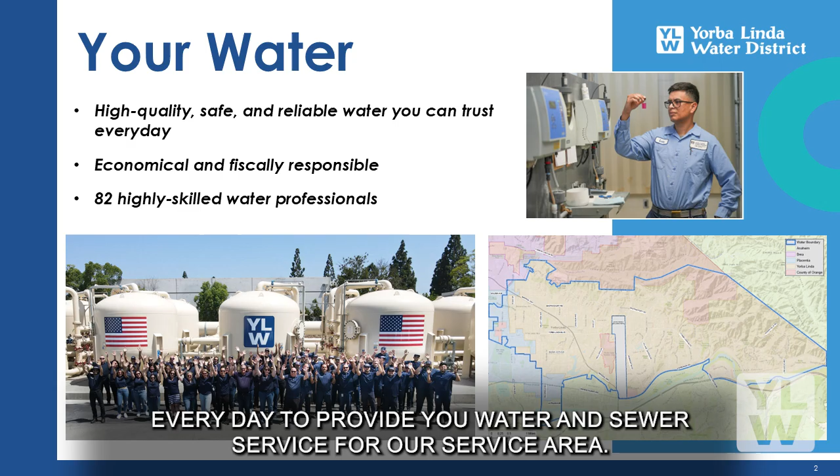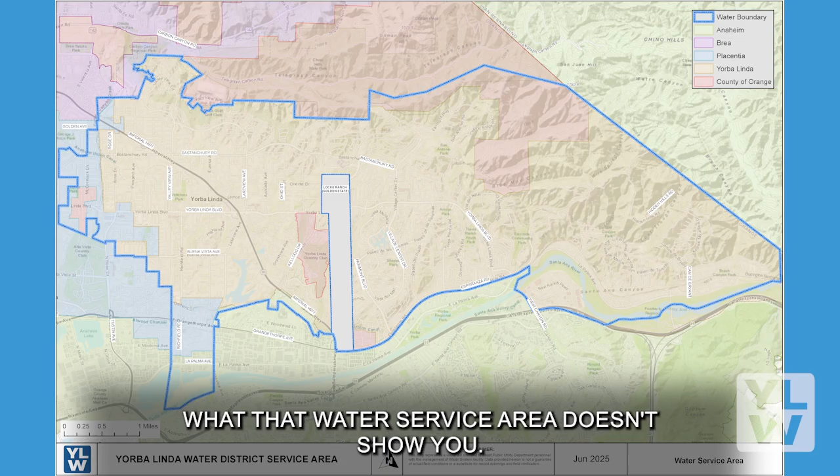For our service area, over here is our service area. And if you look at the boundaries, first off, we're located here in this peninsula in Placentia. We're the Yorba Linda Water District, but we're in Placentia. I never understood that. But we not only serve mostly the city of Yorba Linda, but areas of Placentia, Brea, Anaheim, and unincorporated Orange County. That's 20 square miles.

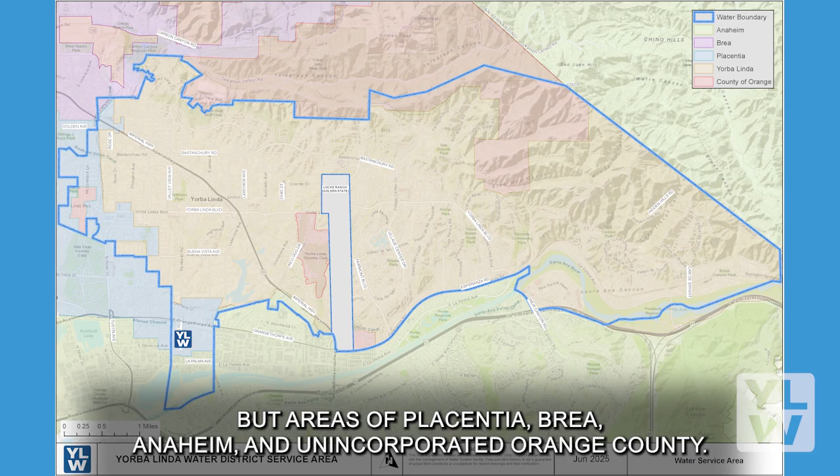Even though it's a two-dimensional rendering, what that doesn't show you, depending on where you live, is the elevation changes that exist here. We're here at the headquarters at about 250 feet above sea level. But there are areas in our eastern sector. Does anyone live on the east side at all? Ma'am, 1,390 feet if you're up in the hills.

So it takes a lot to get the water from where we are located here all the way to our highest elevations. You might notice this area here in Locke Ranch that almost bifurcates our area.

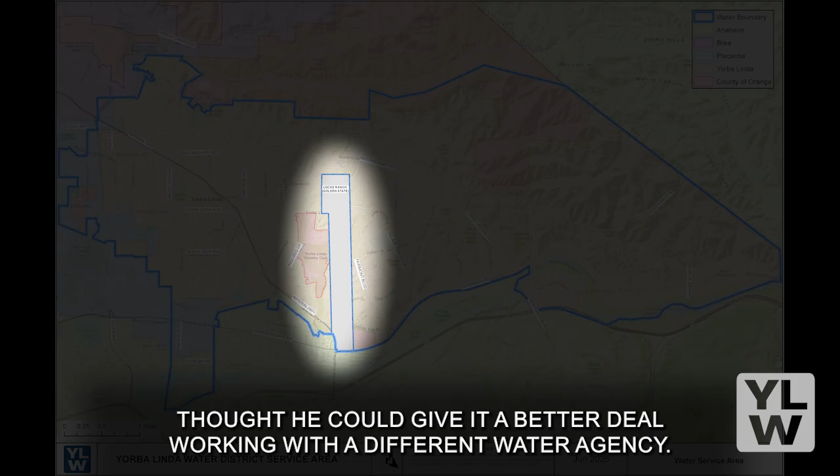So we've been around since 1909, a long time, and I'm not sure exactly of the history, but as this area was getting ready to expand into our eastern area, probably Mr. Locke thought he could get a better deal working with a different water agency. So although we provide sewer service for that area in Locke Ranch, it's actually served by Golden State Water. Okay, so that's why it looks like it is.

The other interesting part of this that people not from Yorba Linda don't understand is that on our northern boundary is Chino Hills State Park. Because we're at a wildland urban interface with that park, we're susceptible to wildfires, which I know you're familiar with given what happened a year ago at the Palisades and Altadena. So we're very mindful of that, and we'll talk about what we've done to mitigate that threat throughout our process.

But we serve a 20 square mile area, about over 80,000 people, in this area that encompasses the Yorba Linda Water District.

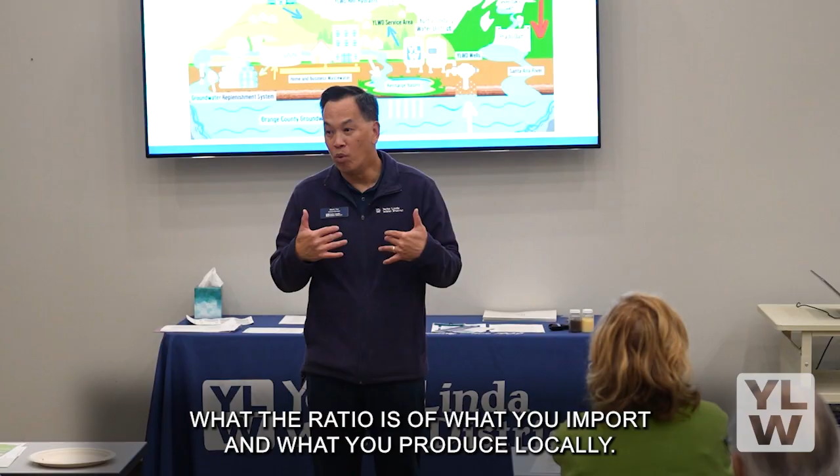I love this slide my staff put together because it really shows how Yorba Linda, the city, gets its water. In the state of California, for all of us in Southern California, there are different ways of getting water. You can import it from Northern California or the Colorado River, or you can create it locally. What makes different areas of the city different is the ratio of what you import versus what you produce locally.

If you look on the right side of the slide, we get all our water through a watershed called the Santa Ana Watershed, 2,700 square miles. The main water feature is the Santa Ana River, about 100 miles long. It goes all the way from Big Bear down and deposits around Huntington Beach and Fountain Valley.

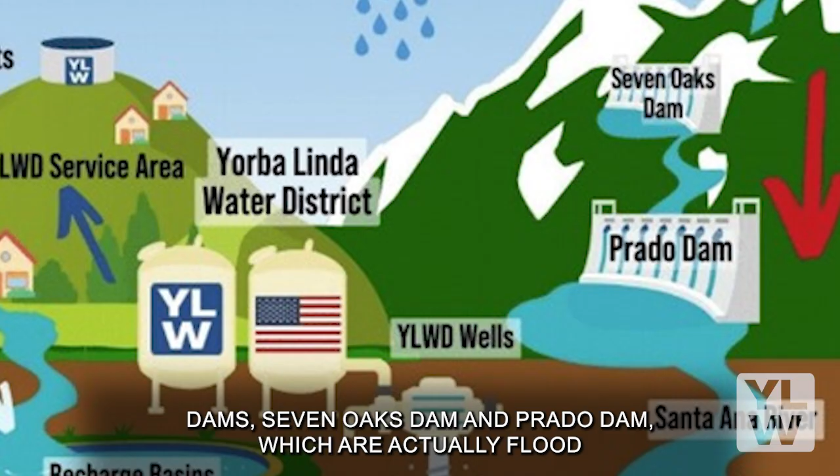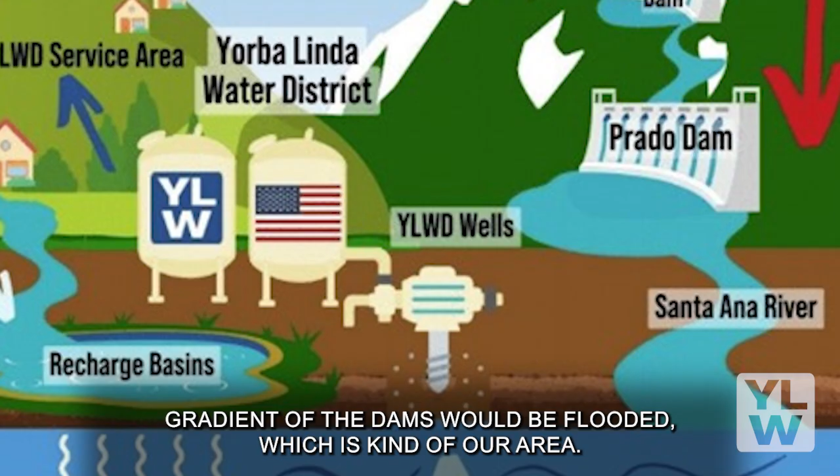So over the winter time, which we're in right now, we rely on the snowpack and the rains that fall in that watershed and river, which goes through dams like Seven Oaks Dam and Prado Dam, flood control structures run by the Army Corps of Engineers. If we didn't have those dams, the area down gradient would be flooded, which is basically our whole area, all the way to the coast.

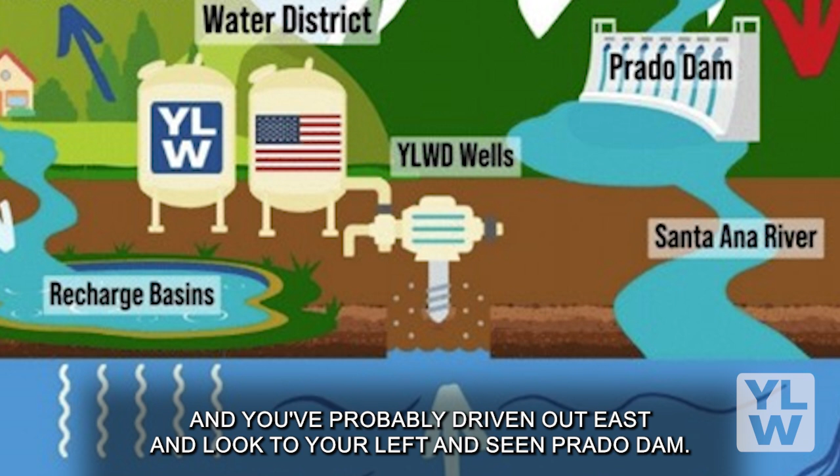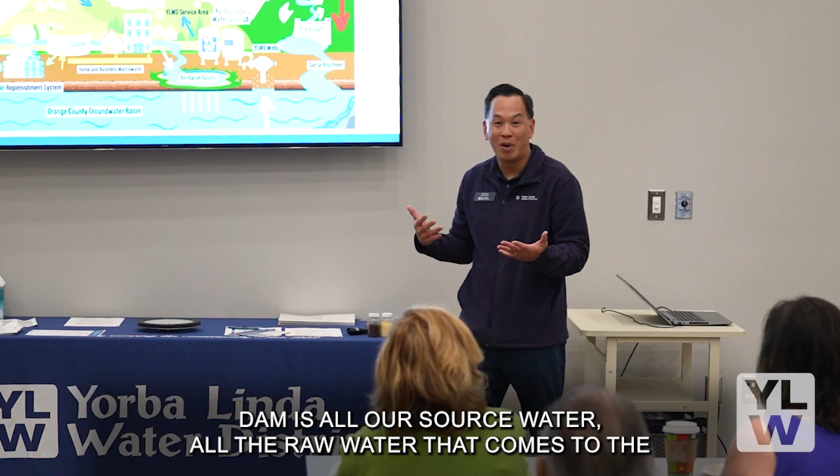Many of you have been on the 91 freeway, driven out east, and looked to your left and seen Prado Dam. The thing you have to appreciate is all our source water, all the raw water that comes to the Yorba Linda Water District, flows out of that flood control dam into the Santa Ana River.

And the Santa Ana River goes by the Yorba Linda Water District. We're the first water district west of Prado Dam for the source water, so everything comes out of there.

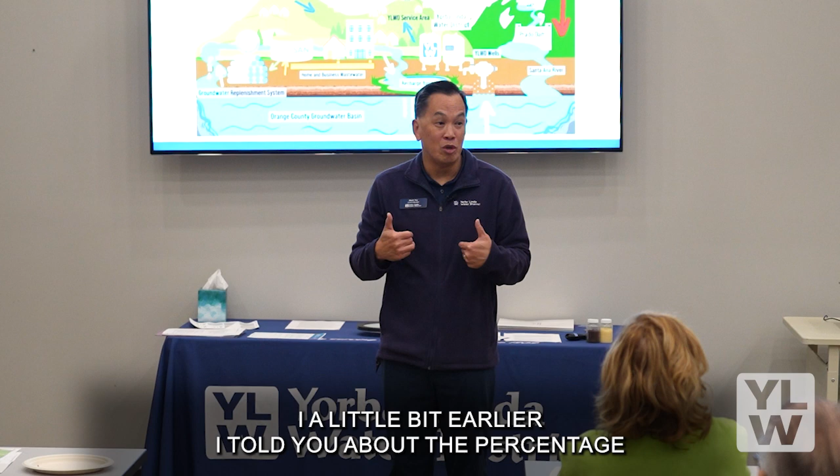I mentioned earlier that the percentage differentiates areas based on how much water you produce locally versus what you import. We're very fortunate — if you live in north and central Orange County, you live in an area with a groundwater aquifer, a reservoir below the surface that allows you to store water. Because of this, we're able to get 85% of our water from groundwater.

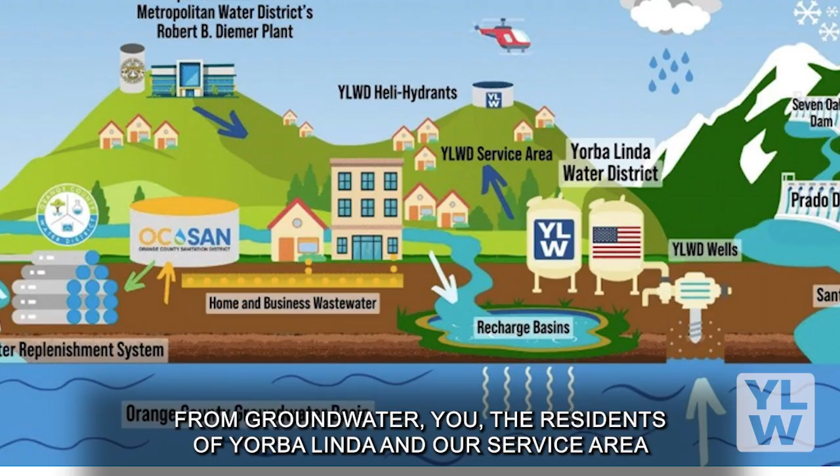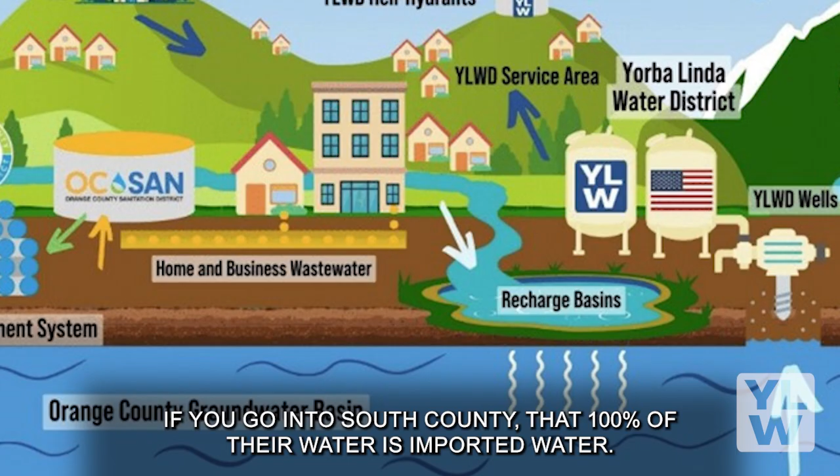So the residents of Yorba Linda and our service area pay a lot less for water than those who have to rely on imported water. There are parts of Orange County, like South County, where 100% of their water is imported from Northern California or the Colorado River. And the key figure to understand is imported water is twice as expensive as the groundwater we generate. So we're very fortunate.

So if you're in north central Orange County, you're very fortunate. My wife wanted to move when we first got here, and I said no, we can't move into South County because they get imported water and we'd be paying way too much. So having this groundwater basin is really great.

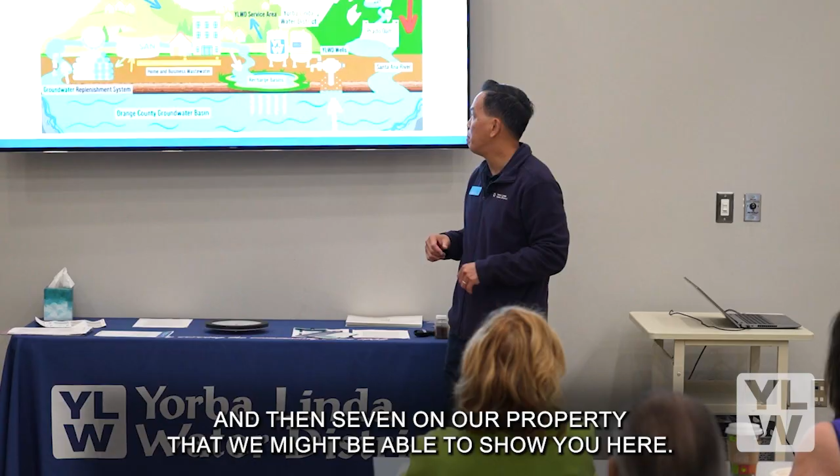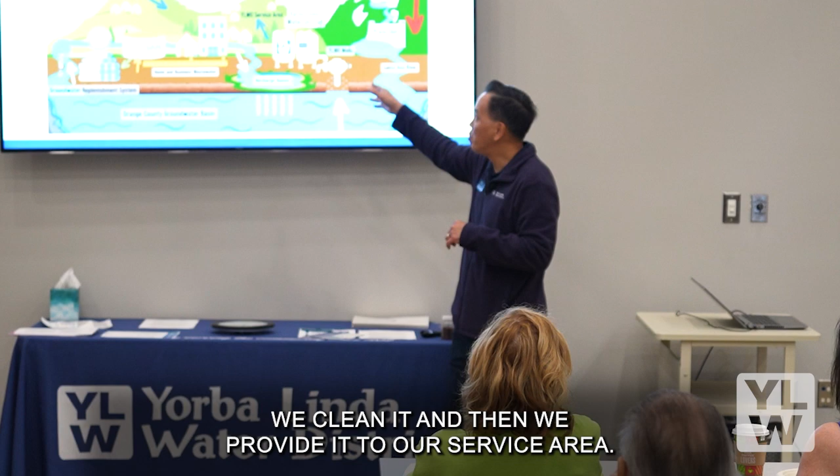So we're the first district, and all our groundwater wells pump water out near the Santa Ana River. We have 3 wells by the Santa Ana River and 7 on our property that we might be able to show you here. Once we pump that water out, it's treated — it has PFAS, which we'll talk about later on our tour. We clean it and then provide it to our service area. You can see the Diemer plant — you've probably looked up in the hills and noticed it.

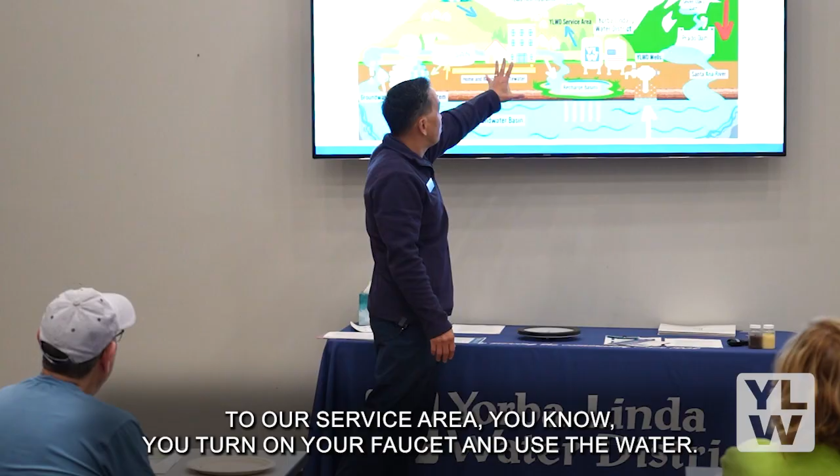That Diemer plant is in charge of the imported water provided to our service area, not only here but to San Diego County and other parts of South County. All flows through the Diemer plant. So once the water is provided to our service area, you turn on your faucet and use the water, it flows into the sewer system, which we manage as well, and then it's gravity fed all the way to Orange County Sanitation District in Fountain Valley, where they do wastewater treatment processes.

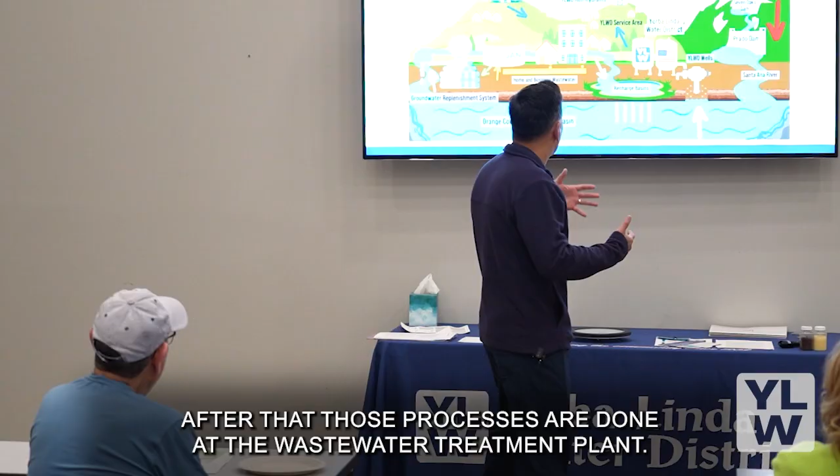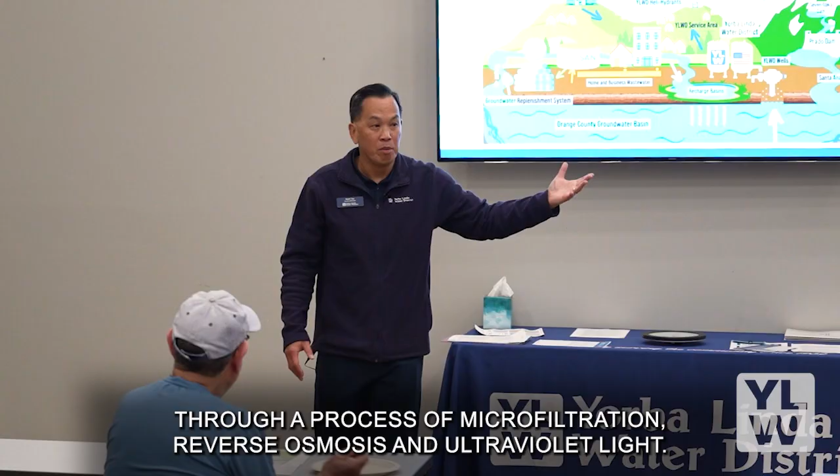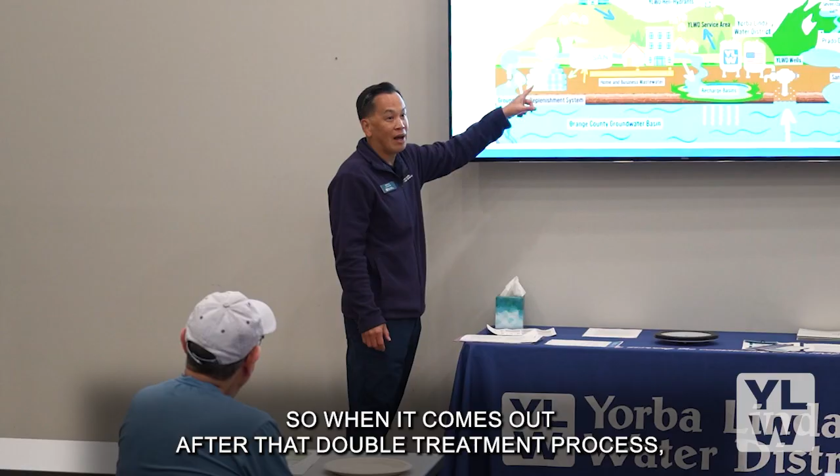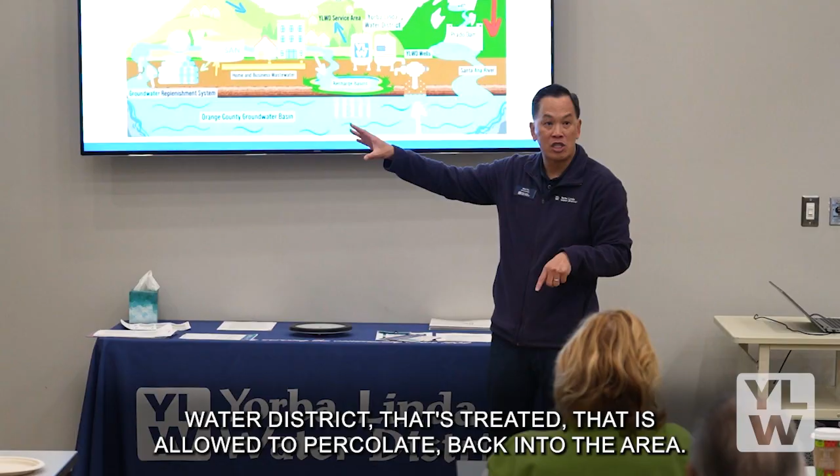Many of you might not have heard of Orange County Water District. They manage the aquifer, but they further treat that wastewater through microfiltration, reverse osmosis, and ultraviolet light. They treat it so well that you can actually recycle that water. After that double treatment process, first at the wastewater treatment plant and then at Orange County Water District through its groundwater replenishment system, it's pumped all the way back up to the recharge basins. You might have seen those recharge basins just south of Orangethorpe, west of Rose Drive. That's water pumped back from Orange County Water District that's treated and allowed to percolate back into the area.

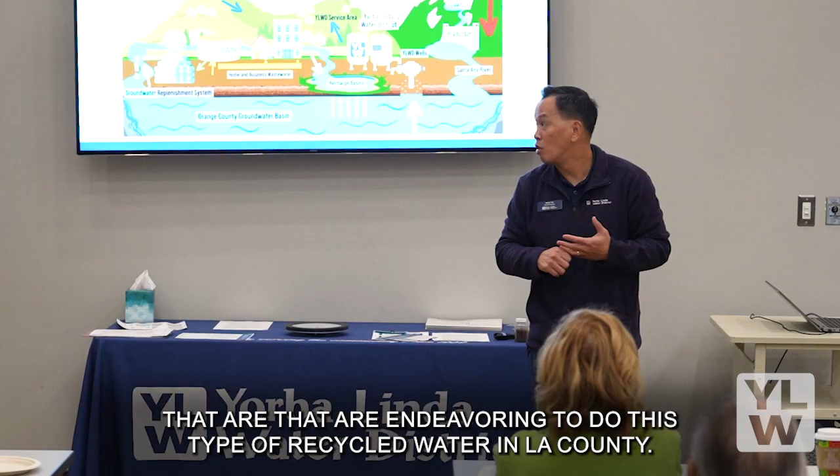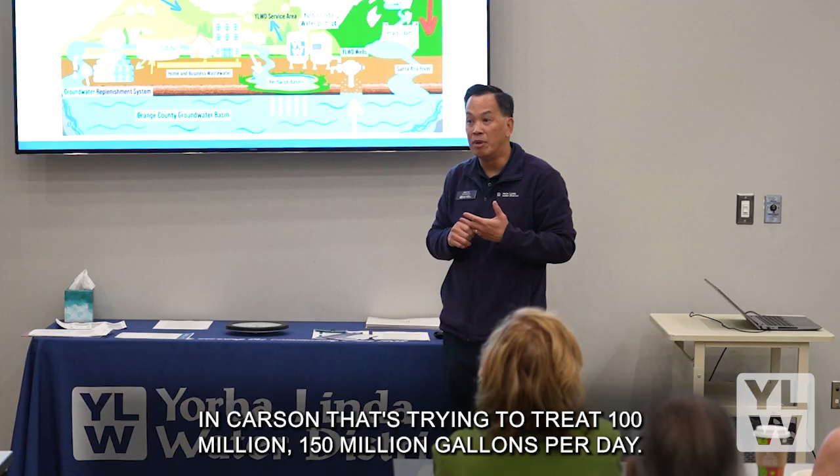When you talk about recycled water, Orange County in this area has been doing this since 2008. There are different parts of Southern California that are endeavoring to do this type of recycled water. In LA County, they have a big, really expensive pure water facility being built in Carson that's trying to treat 150 million gallons per day. They want to do what we've been doing here in Orange County since 2008. This facility here can treat up to 130 million gallons per day.

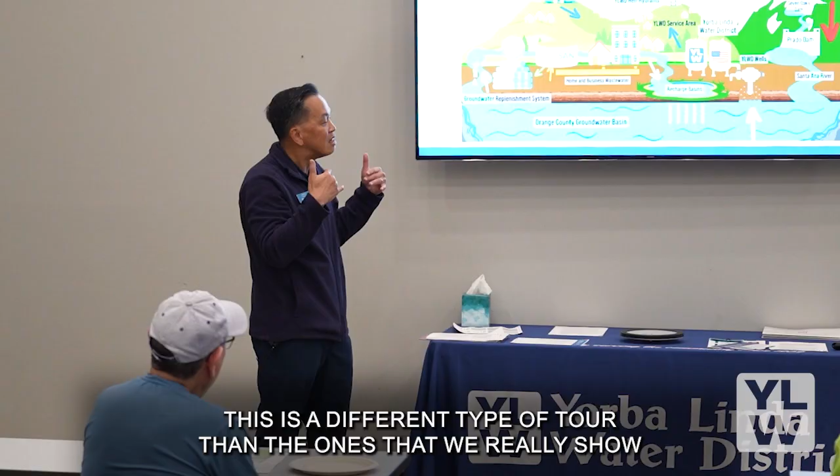A lot of water. So this is the picture I want you to think about when we talk about our tour here. This is a different type of tour than the ones where we really show our infrastructure, because we're trying to show you behind the bill and what the rates are going to be able to help us do in the Yorba Linda Water District. That's my last slide, and I'll turn it over to our CFO, Christine McElrevy, who will jump a little more into the rate study and why we're doing what we're doing. Throughout it, you can stop us anytime, and we'll answer any questions.

Good morning. I'm going to give you more of a high-level review of the rate study, but I'm happy to answer any more detailed questions that you guys have, either after this tour while we're on the bus or even after that. I can stick around after the tour if there's any detailed questions.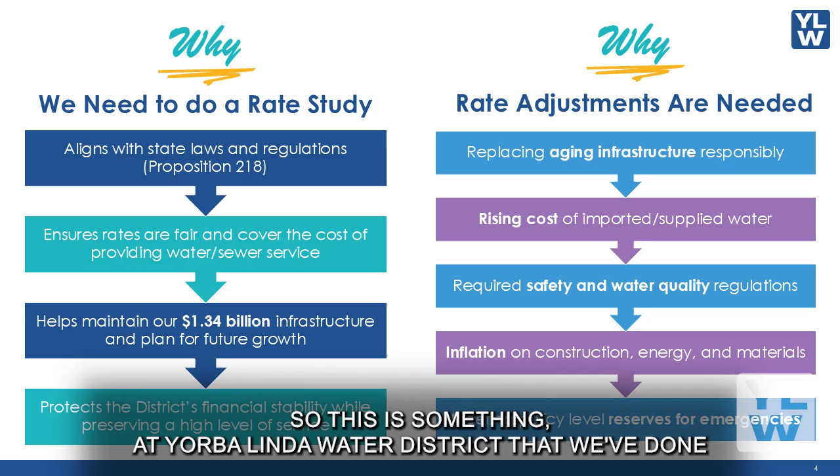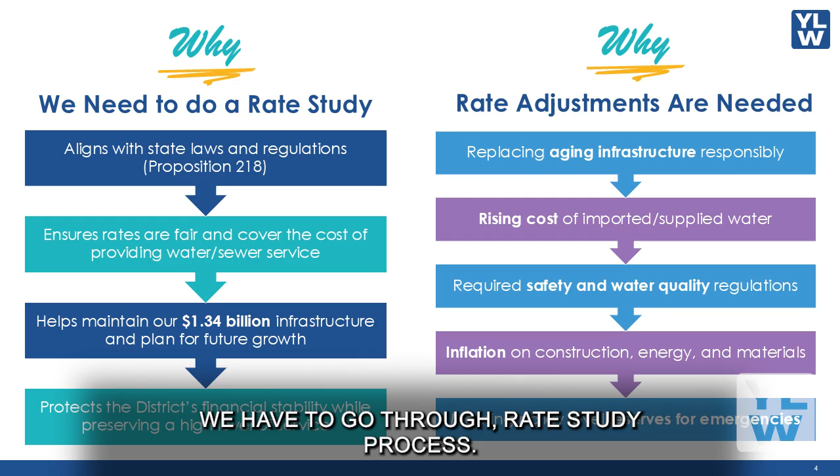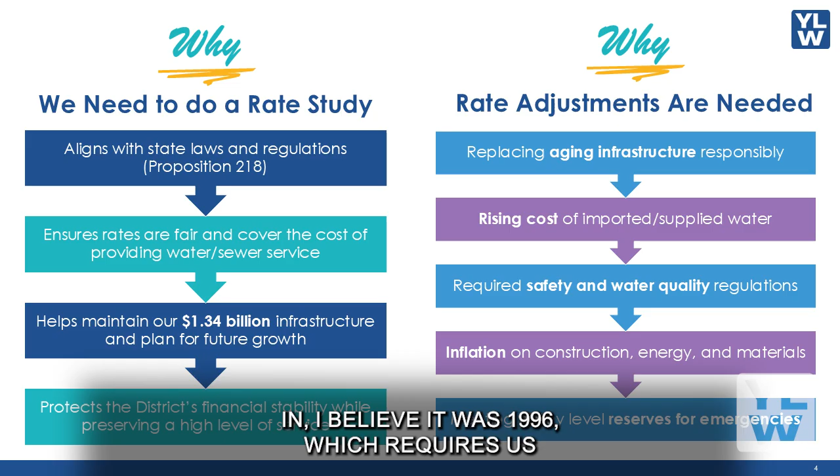So why do we need to do a rate study? This is something at Yorba Linda Water District that we've done every 5 years over the last at least 10 plus years. It's actually California law that anytime we look at our rates and determine whether or not an increase is needed, we have to go through a rate study process. It's governed by Proposition 218, which was passed by California voters back in, I believe, 1996, which requires us to go through this process, which Mark mentioned earlier — we hired an independent consultant for it.

So it's a process that's been going on almost a year now. We hired the consultant about a year ago, and what they do is go through the financial plan, look at our costs, and then look at our current rates and whether or not those current rates cover the costs over the next 5 years. And if they don't, then that's when we have to propose new rates. Part of California law requires us to make sure our rates are fair and that they cover the cost of providing water and sewer services. So what that means is we can only charge for our costs to recover those costs.

That's a very important part of that proposition. We have $1.34 billion of infrastructure, so having those rates helps pay for that infrastructure. That's really a large part of what those rates go towards, probably the largest part. And what that does is help protect our financial stability and preserve our high level of service.

To give you an example, if we were not to do a rate increase, we have different levels — what's called a debt service coverage ratio, because we do have debt on our books that we have to meet. If we were not to do a rate increase, we would not meet that debt service coverage ratio in a few years from now. So it's very important to meet that — it's a legal requirement. And then there are other target levels that we need to meet as well.

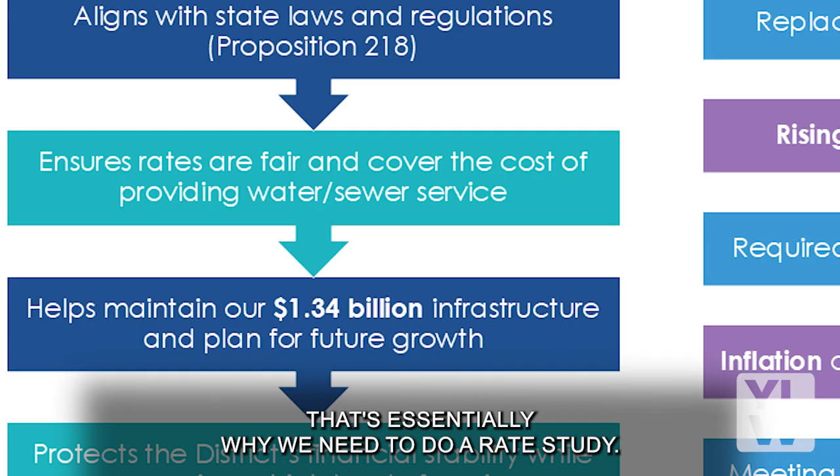So that's essentially why we need to do a rate study. One thing I want to point out that you may or may not be aware of is the rate schedule. It goes over 5 years. Those are maximum proposed rates, so that's the maximum that the board can increase the rates.

Every year, though, it's not an automatic increase. Usually in the spring, around April or May, we take it to the board, look at our financial plan and current circumstances, and reevaluate whether we recommend doing that maximum increase or even a lower increase. So if circumstances are like, say we get a lot of grant money we weren't expecting, since we do actively pursue grants, we could possibly recommend a lower increase. Not making any promises there, but just want you to know we look at that every year.

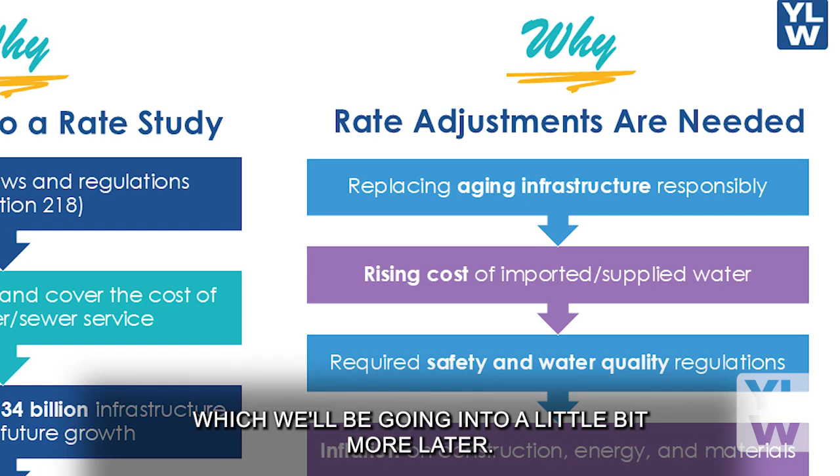Why rate adjustments are needed: Mark just touched on some of the infrastructure, which we'll be going into more later. We have aging infrastructure. Our agency is over 100 years old. Our first reservoirs, I think 2 of them, were put in in 1911. So we have to maintain that infrastructure.

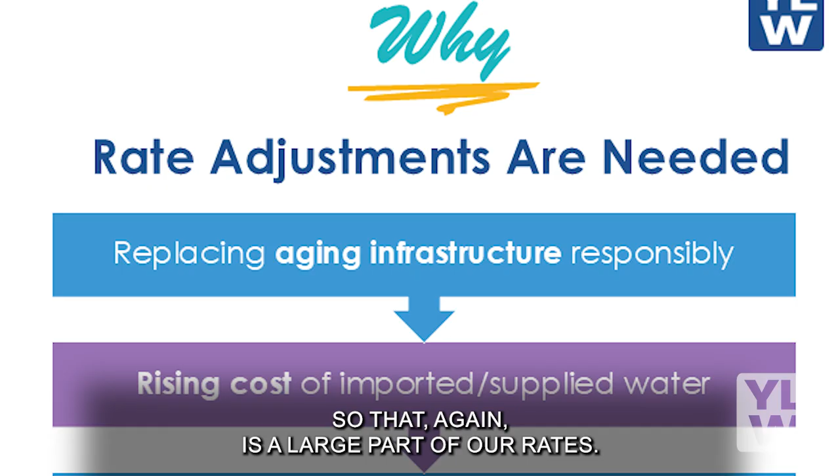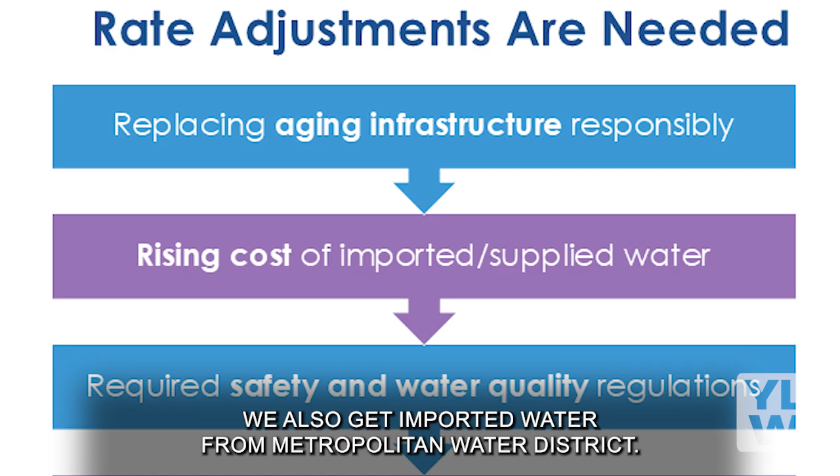That again is a large part of our rates. We also have rising costs of imported water supply. As Mark said, we're really lucky that we get groundwater from the Orange County water basin, and we also get imported water from Metropolitan Water District. For example, Metropolitan just came out with their budget over the next 2 years. Their proposed budget hasn't been passed yet, but they also have projections over 10 years. Their proposed budget is a 9.5% increase in 2027 and 2028, over the next 2 years, and then 9% each year after, over a 10-year period. So that's just an example of what we're looking at.

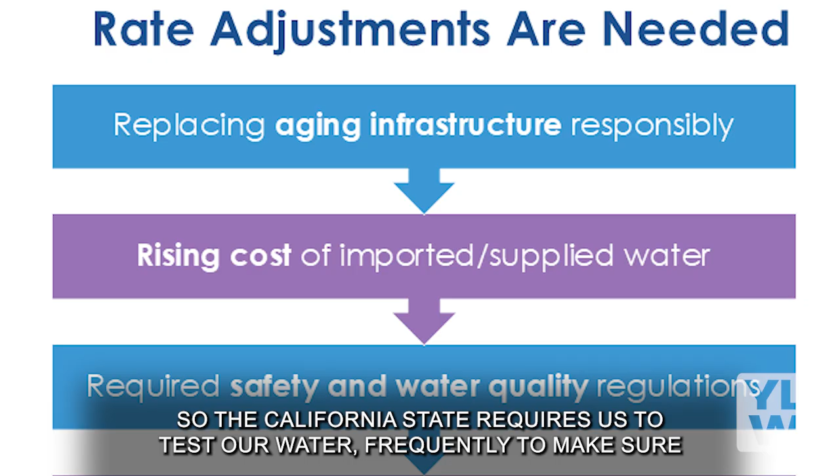We also have required safety and water quality regulations. California state requires us to test our water frequently to make sure we're providing safe and reliable water, which is a great thing. One of the things California state came out with about 5 years ago was related to PFAS. You'll see the PFAS treatment plant we put in, operational around 2021-2022, and you'll get to see that on our tour. But with that comes PFAS treatment costs we have to pay for.

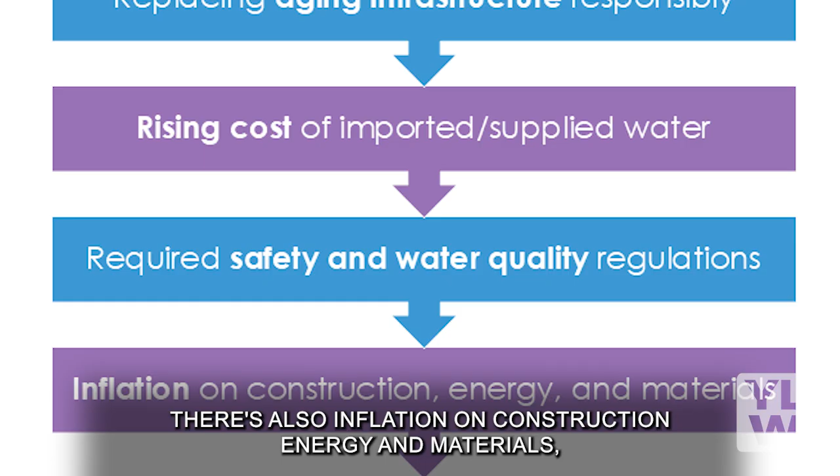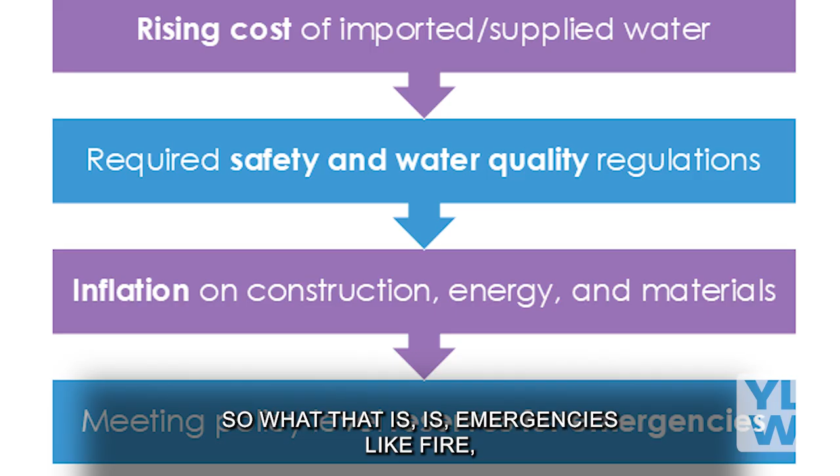There's also inflation on construction, energy, and materials that we have to factor into our rate study. Along with that, we have a policy for reserves to cover emergencies like fire, drought, flooding, and earthquakes. We want to make sure that if any of those were to happen and impact our facilities, we have those reserves to pay for the replacement or repair.

So going a little more into infrastructure, what the rates pay for. As I mentioned, we have $1.34 billion worth of assets, that's 56,000 individual assets, so it's an extensive network we maintain. That's more than just water from the tap - it includes our reservoirs, booster pump stations, and the personnel that work 24/7 to make sure you're able to get water every day, whenever you turn on the tap, safe and clean.

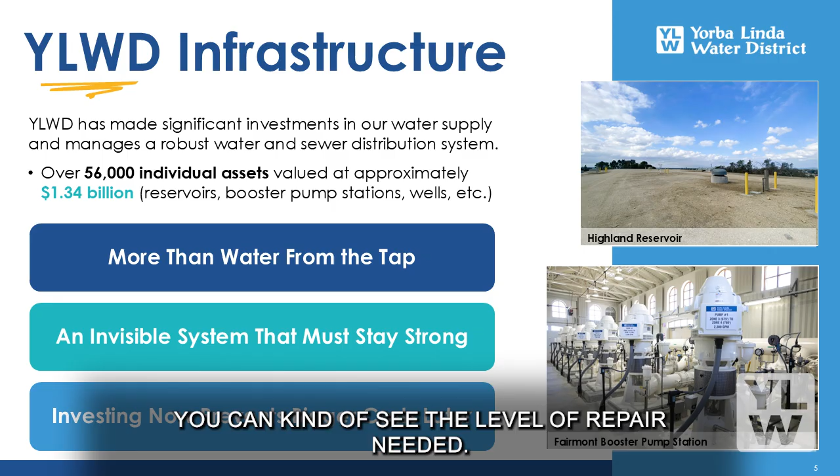We're different from some infrastructure like roads and bridges that you can see as you pass over them - you can kind of see the level of repair needed, like if it's a really old bridge that needs to be replaced. We're a little different because a lot of our infrastructure is underground, but it still ages, so it still has that condition that needs to be replaced and repaired so we don't have expensive added costs to fix it in an emergency situation.

Investing now prevents bigger costs later. If something were to break unexpectedly, it's a lot more costly than if we plan those replacements - more costly in labor and material because it's an emergency situation. So we want to make sure we're planning for those aging infrastructure assets so we don't run into expensive repairs and maintenance, and it also helps prevent unexpected outages like a line break. You always want to plan for those rather than having to do them unexpectedly.

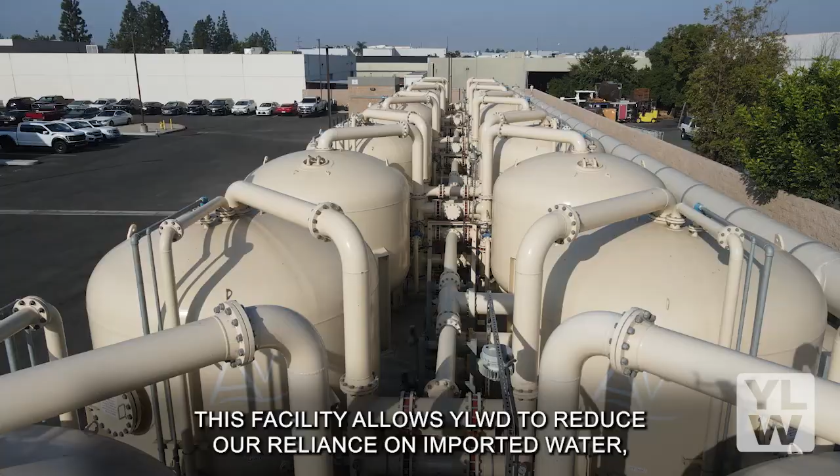Infrastructure-wise, one of the biggest infrastructure pieces that you'll be seeing on the tour, actually the first stop, is our state-of-the-art PFAS water treatment plant, the biggest in the nation. We have people from agencies all over the world come here to see what our treatment plant is like and how we operate it. It's one of our district's most vital assets. This facility allows YLWD to reduce our reliance on imported water, which costs 2 to 3 times more than our local groundwater, saving our customers money.

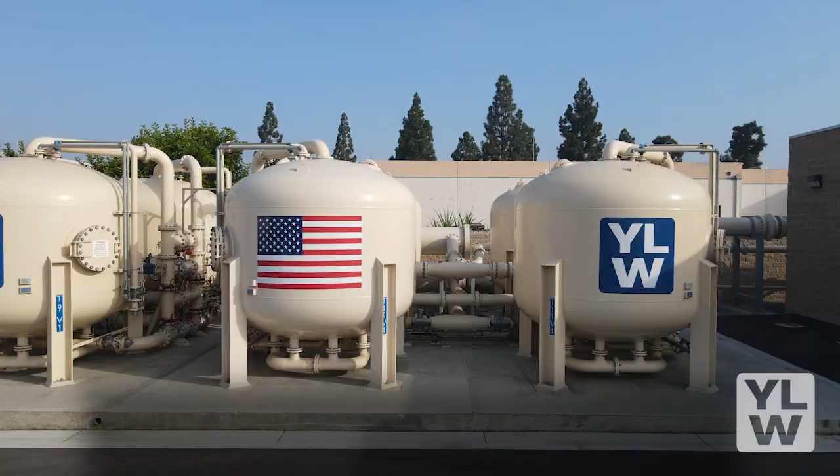Another proud achievement is our investment in helihydrants to aid wildfire response and protection. Helihydrants are large tanks strategically placed in our service area. They can be filled with water remotely by our staff or by firefighting pilots in the event of a wildfire. Helicopters draw water from these helihydrant tanks to fight fires more efficiently. Our service area has 3 helihydrants, 2 of which are YLWD owned and 1 in partnership with the Metropolitan Water District of Southern California, covering our service area from the east side to the west side. It's a proven asset that has strengthened our partnerships, protected our communities, and demonstrates the district's commitment to public safety and resiliency.

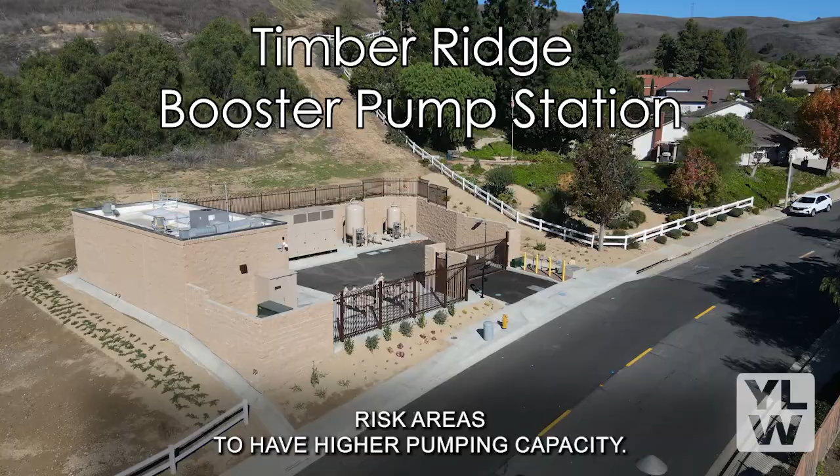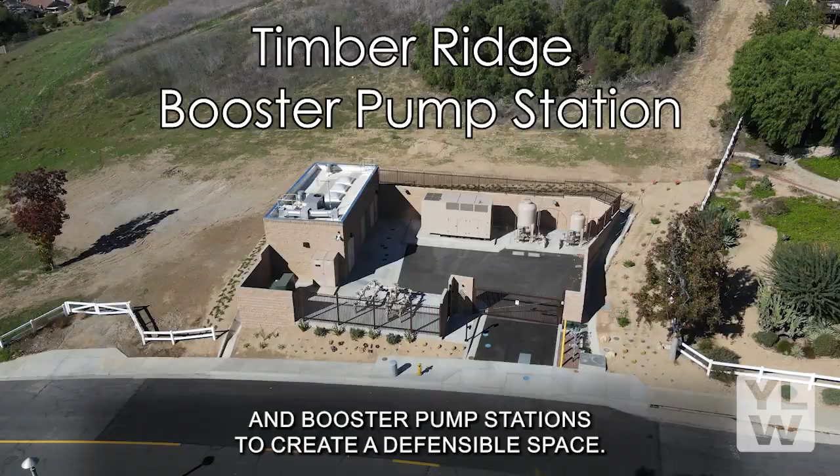YLWD has also fire-hardened our water infrastructure. We have invested in emergency backup generators to stay ahead of power outages, both portable and permanent. We have upgraded booster pump stations in high-risk areas to have higher pumping capacity. We've cleared vegetation around district facilities like reservoirs and booster pump stations to create a defensible space. And we have built protective walls around sensitive electrical equipment.

The last one listed here is the upgrade to AAA bond ratings from Fitch Ratings. Public agencies are issued bond ratings similar to personal credit scores. Almost 2 years ago, the district's bond rating was upgraded from AA+ to AAA, placing it at the highest level on Fitch's rating scale. This is a testament to the district's dedication to financial responsibility and transparency, and benefits the district with low interest rates on debt financing options.

I'm not going to talk too much about this one since we'll be seeing some of these on the tour and we'll get into more depth on them there. But the overall takeaway is that over the next 5 years, our capital projects and capital outlay, which is basically our purchased assets like vehicle fleet maintenance and equipment, will total $62 million over the 5-year period.

We did what's called an asset management plan back in 2018, where an independent consultant evaluated all of our assets over a 100-year period to see what we needed to replace. What they came up with, which is available on the website as an executive summary, is that we need at least just under $13 million per year to replace those assets. That was in 2018 dollars, which are worth more now than they were then, so that's a significant amount.

So we're at $62 million over 5 years, which is about $12 million per year, so we're under the amount in our asset management plan. That's still a very significant investment, but we do it because of the aging infrastructure. We want to make sure that we can continue to provide reliable water to our customers.

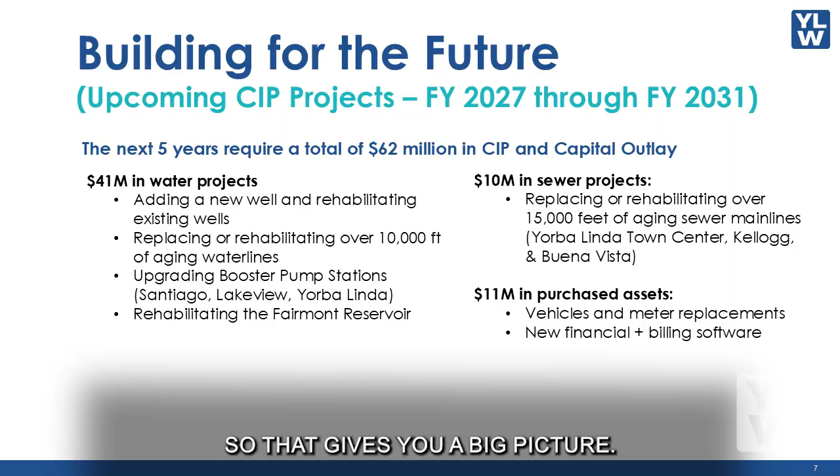Of that amount, the majority is in our water projects, $41 million. $10 million is in our sewer, a lot of that replacing sewer main lines, since nobody wants a sewer break, so we need to make sure we're maintaining and replacing those. $11 million is in our purchased assets, which again is our vehicle fleet, equipment, and meter replacements. So that gives you a big picture look at what we're looking at dollar-wise, and we'll go into some of these projects on our tour.

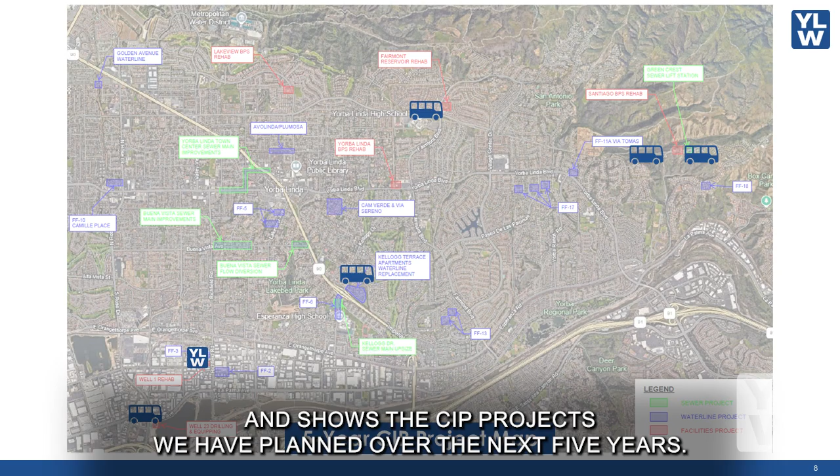This slide is a map of the district and shows the CIP projects we have planned over the next 5 years. This map is also available in your tour packet. The locations with the buses are the stops that we will be making during our tour.

We're going to wrap up the presentation portion, but these are other ways to stay engaged, and there are many ways to stay engaged between now and the public hearing or throughout the whole rate process. I'm glad you're here today because you're hearing about the public hearing on April 9th, so we invite you to come to that and stay engaged with us.

Another thing is tell others about the Behind the Bill tour. We have two more, one on March 10th and March 24th, that we're still accepting people on our wait list for. Depending on how big those wait lists are, we can add another tour so we can continue educating our customers before the public hearing.

Another way is to just visit our website. Our website is really the hub of everything rates related. If you go to our homepage, YLWD.com, there's a button right front and center that says rate study. It'll direct you to our rate page, which has the study that Christine talked about. It'll also have some of the tour information you've received today and the presentation we just went over, plus the virtual tour option, which is why we have Brian in the back recording, because we want to make this available to everybody in case they cannot join us in person.

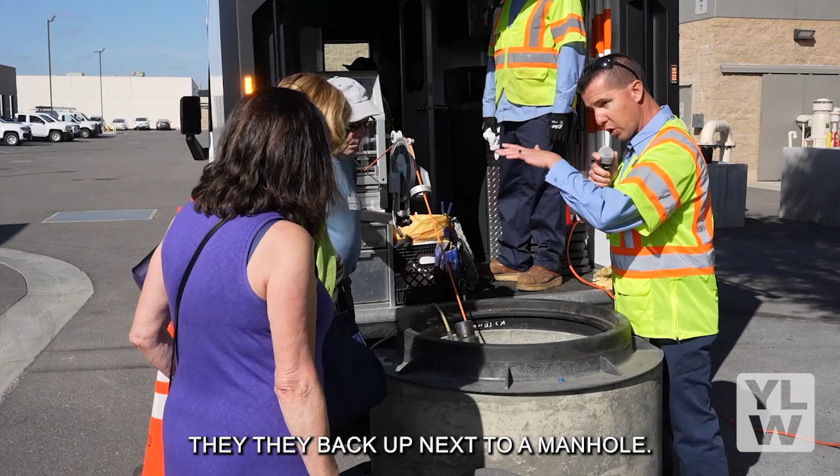So this is a simulation manhole. Obviously this would be at the street level, right? These are those manhole covers you see on the street. The operators come, back up next to a manhole, lower the robot down inside, and begin their inspection. We can inspect up to 1,600 feet away from this van. It's really kind of wild to be in one neighborhood and have your robot in another neighborhood.

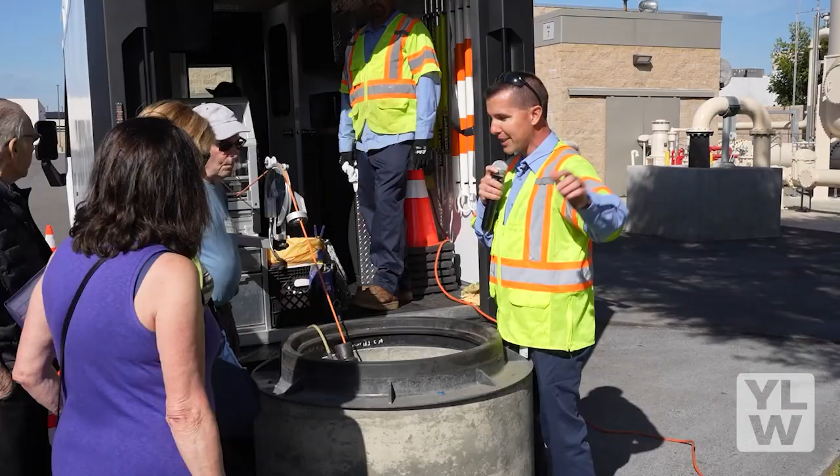But it gives us a lot of flexibility there. One of the nice things about sewer lines is that they're non-pressurized, and there's an airspace above them. Sewer lines are typically only 5 to 10% full, which means we can send robots, cleaning equipment, and other devices inside the pipeline too.

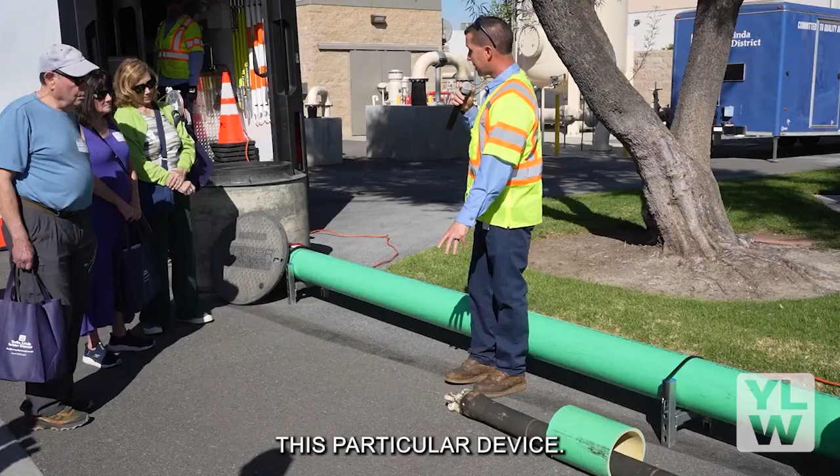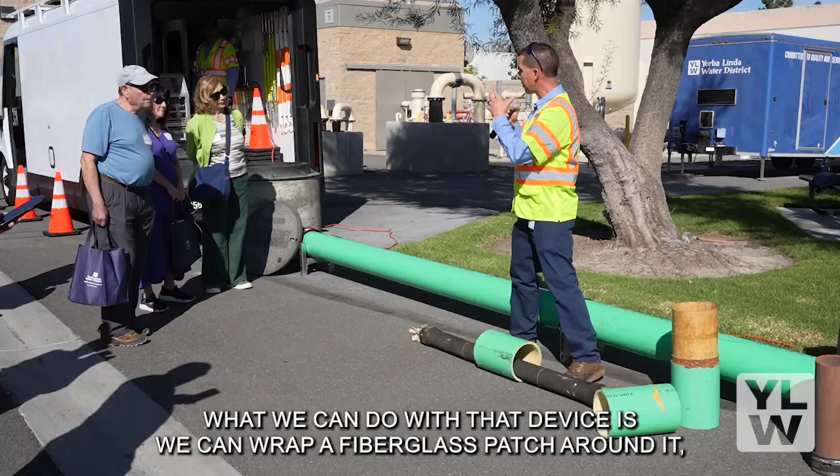This particular device inflates to fill up the entire space of the pipe. What we can do with that device is wrap a fiberglass patch around it. When we find a crack inside of a pipeline, this would be from the outside, right? When we find a crack inside, we can install a fiberglass patch in there. This is a full structural repair on this pipeline. It's a 50-year structural repair, and we can do this without digging up the street.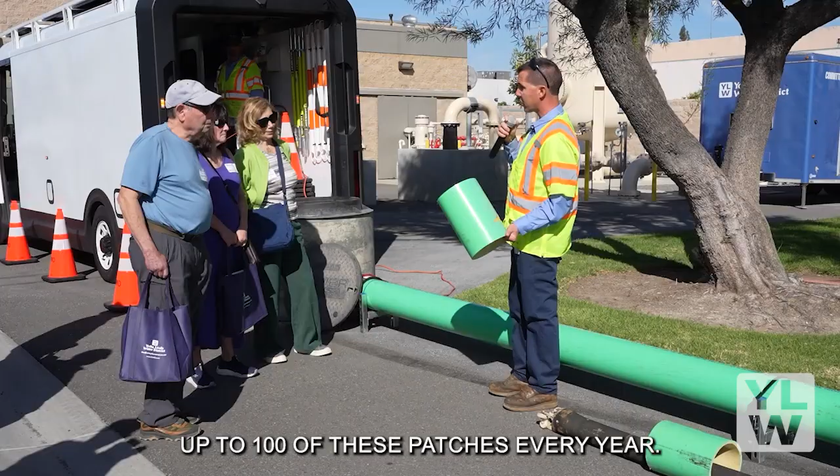Another shout out to our crews, because a lot of other agencies contract this work out. We do a lot of this work in-house. Our crews install up to 100 of these patches every year. So we're on the lookout to try and find small defects that we can effectively patch before they become bigger problems, which end up costing more money in the long run.

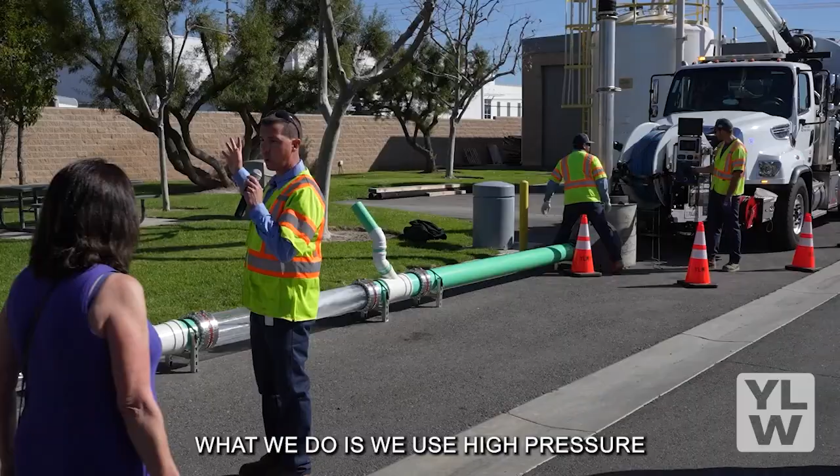What we do is use high pressure water off of the truck, supplied through the front hose reel. The high pressure water is sent to the cleaning nozzle up front. The cleaning nozzle rotates and scours the inside of the pipe with high pressure water to remove roots, debris, grease, wipes, and grit, whatever happens to be in there. It's really important to clean the pipe before we do video inspections so we can get a full idea of the structural condition of the pipe. If the pipes aren't clean when we do our inspections, we're not going to see everything that we need to.

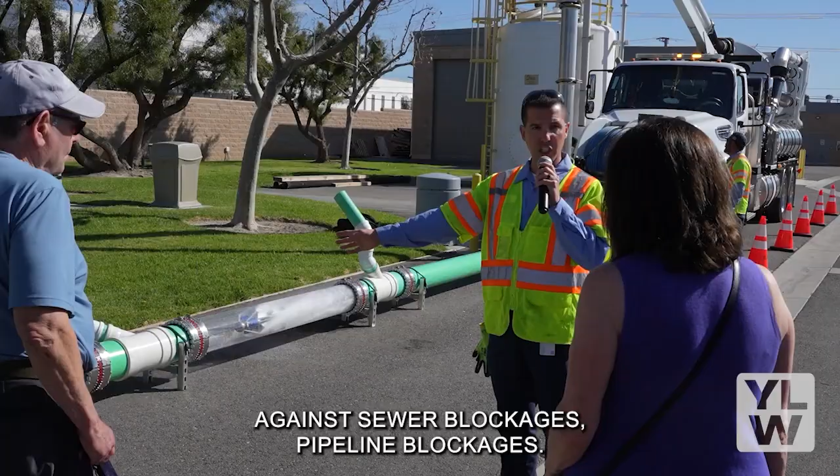These trucks are our first line of defense against sewer blockages, pipeline blockages. If there was ever a call about sewage coming up in your neighborhood in the street, this truck is going to be one of the first vehicles to roll out there and try to use the high pressure water to penetrate a hole through the blockage and restore flow inside of a pipeline.

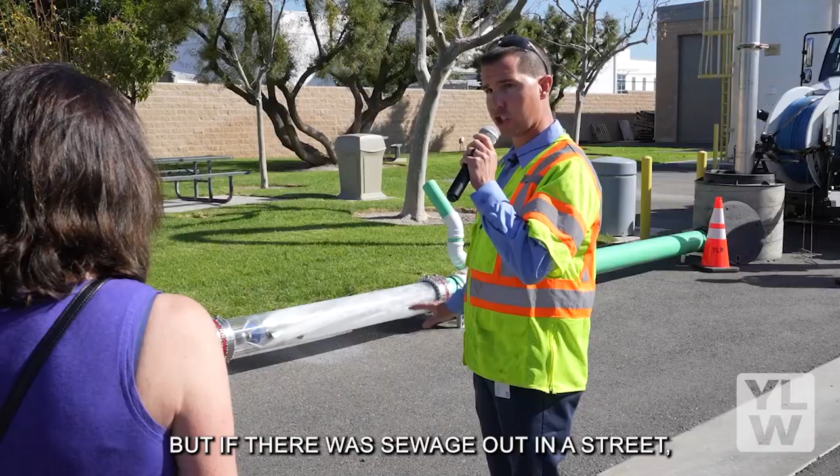The other thing it's doing is vacuuming. We don't vacuum all the time, a lot of times we just let it go down. But if there was sewage out in the street, we would vacuum and clean up all of that debris that's spilled out. It can do 1,001 different things, and every one of them comes in handy at some point.

If you've been to the open houses, you see we have some fake poop.

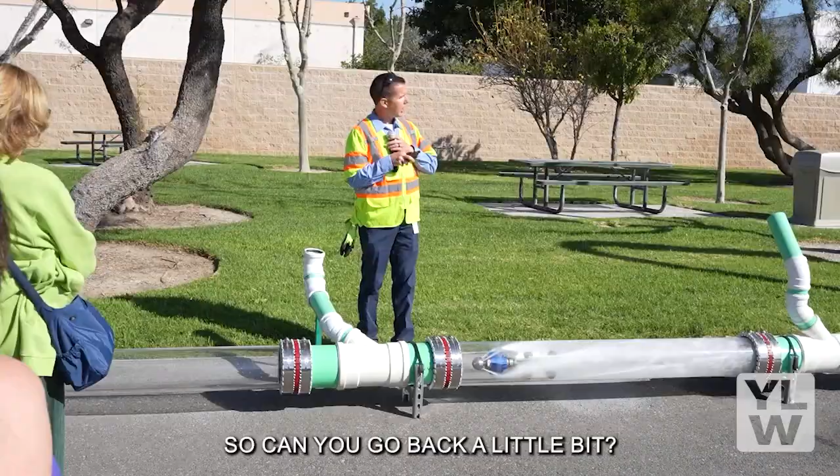So, can you go back a little bit? And then throttle down. It goes kind of quick, so you gotta watch it because it's just light.

So you would flush from your home. It goes down a lateral connection at your home into the sewer gravity main, and then away it goes. And that's how our wastewater collection system works.

We're a groundwater agency, a groundwater producer. In order to produce water from the groundwater and draw it out, you need wells. Prior to my joining the district about 4 years ago, I worked for the Army Corps of Engineers. I was active duty for 35 years, and the Corps actually operates all the dams along the Santa Ana River.

Seven Oaks Dam up in San Bernardino was built by the Corps of Engineers in 1994. Prado Dam was built in 1941. So when they hired me, I recognized what I might be able to do to help this water district is unlock some of the grant funding so that you can build a well.

Anybody have any idea how much it costs to build a groundwater well? A few million? A lot more than that. 10 to 13 million dollars—actually more like 13 million was the last estimate we did. That's a lot to build a groundwater well drilled down about 1,000 feet. Our wells operate anywhere from 300 to 500 feet, but it takes a lot to put it together.

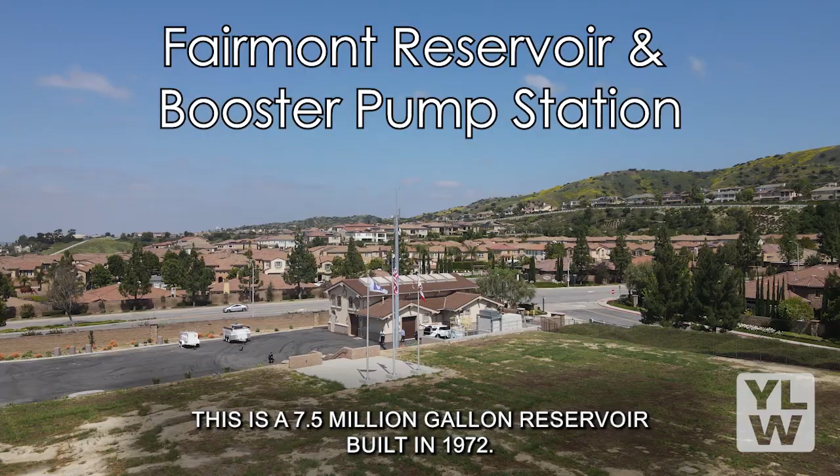So you're standing on top of the reservoir right now. Underneath us is a 7.5 million gallon reservoir built in 1972. It's one of our oldest reservoirs.

We had a structural engineer come in to identify some issues we needed to take care of. They dive in, use cameras, videotape the whole area, and give us a report - saying, you have some issues here, you probably want to address this crack. We get that report and make a plan to do the maintenance.

Some of that is cleaning. They'll be down there with a vacuum, probably about this big - a little bit bigger actually - going back and forth on the floor of the reservoir, cleaning the bottom. They have pumps up on top that go into a filter, and all that junk gets hauled away.

Thank you, Freddie. Yes, last year we tasked one of our consultants to do a more thorough condition assessment and seismic analysis to make sure the reservoir can keep up as it's aging. We need to make sure it can be reliable for future use.

So we emptied the bays one at a time, sent the engineers inside. They did a detailed condition assessment, studied the original design of the infrastructure, and looked at the current codes. They gave us recommendations for short-term repairs, which were done last year, and long-term repairs - essentially bringing the tank to current seismic code - which is planned for about 3 years out.

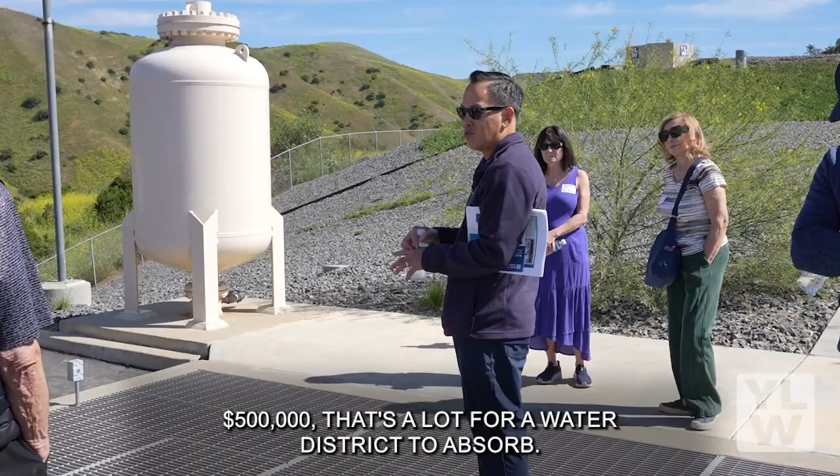I'll mention that the team was able to get a $500,000 grant from the U.S. Forest Service, Department of Agriculture, and it was a 1-to-1 match. So they gave us $500,000 in federal funds and we had to match it. Even $500,000 is a lot for a water district to absorb, so we were able to get a subrecipient and bring in an additional partner, and we built that at the Deemer plant, and with that they actually built the helihydrant.

If you look at the costs, I think this one was about $100,000. The other one in Camino de Bryant was about 450,000. The one over at Deemer they built in-house was north of 1.2 million.

With that third helihydrant, as Freddie talked about, it's all about response, and we're really proud of the relationship we built with Orange County Fire Authority because it's about responding quickly to fires. You can fill up the tanks — these different helicopters can fill their tanks anywhere from 1,000 gallons for the Firehawks up to about 3,000 gallons for the CH-47 Chinooks, and they can respond very quickly to fires. They do training here, not only during the day but at night. We'll get calls, and our public affairs will let people know when they're doing that kind of training and doing the dips.

There are a lot of communities in Orange County now trying to build these helihydrants, or they have helipods that are more mobile that connect to a water source. So the water source that connects all these helihydrants is the same water that we provide to our service area. It's a benefit to the community to fight fires. What they like about the water we provide is they're able to operate with a very clean system. If you have to go to a lake and drop the hoses down and pull up water, you get a lot of debris that usually gums up a lot of the helicopter systems they use. But great partnerships with Orange County Fire Authority, great partnerships with the city.

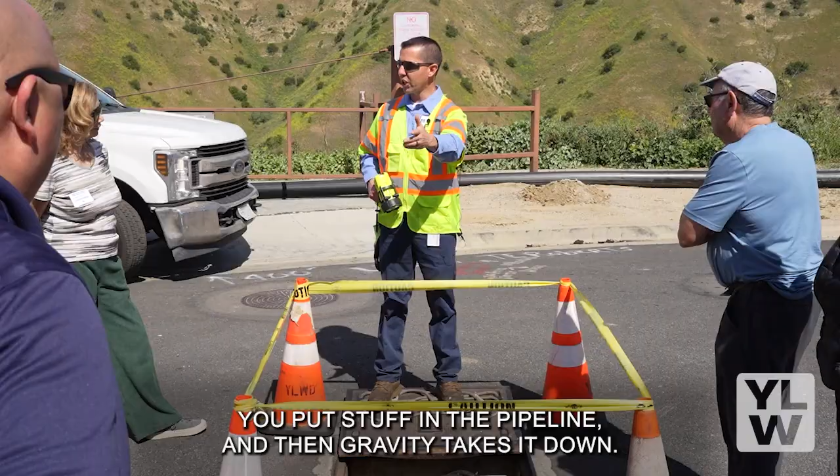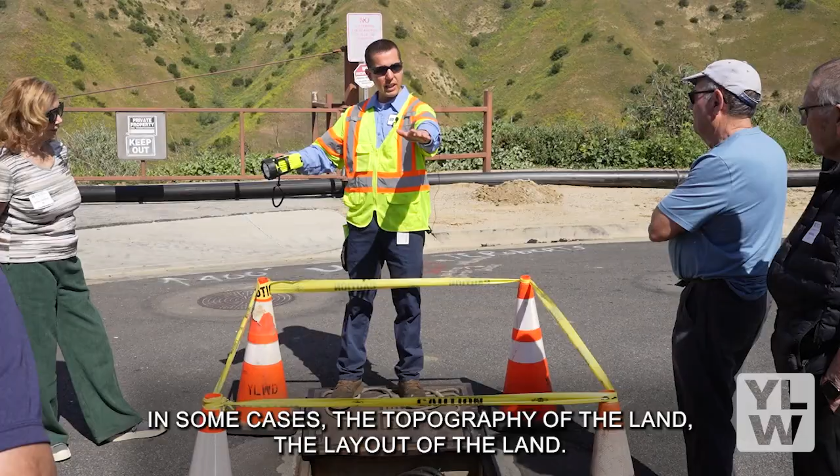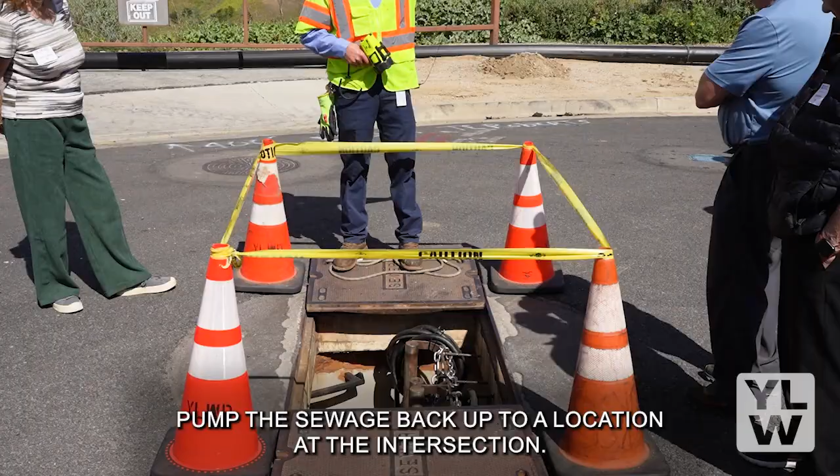Back in the yard, you saw a pipeline. You put stuff in the pipeline and gravity takes it down, gravity does the rest. For some houses, gravity can't do all the work for us. In some cases, the topography of the land says the pipeline has to end here. So wastewater from many of the homes on this street all comes down to this point, to this sewage lift station. From here, there are 2 submersible pumps that pump the sewage back up to a location at the intersection of Greencrest and Sky Ridge, where the wastewater can then flow down by gravity on a different portion of the hill. Gravity is the most efficient means of conveying it, there's no energy involved, so we like to use gravity when we can. This is just one of those places where we have to have this lift station.

Yeah, that's pretty much it. Any good questions? Did we mention the grant here?

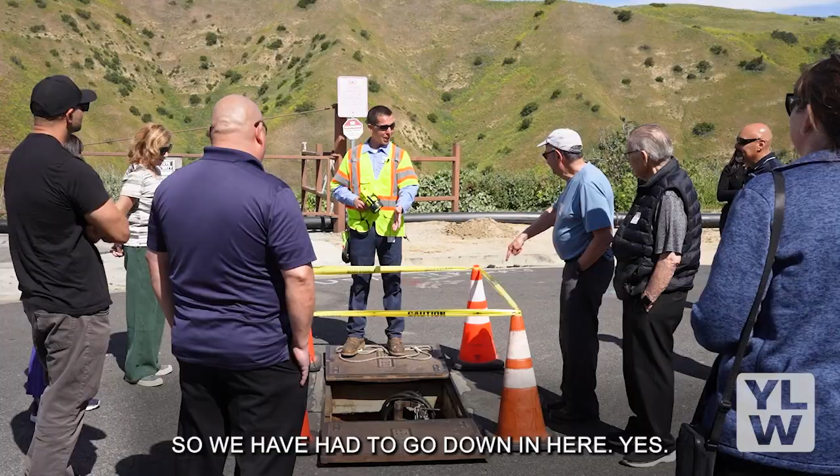Somebody climbed down there, so we have had to go down in here, yes. It's a confined space. All of our staff receive training every year on confined space entry. It's a really complicated procedure of having the right people, the right equipment, gas detection equipment, fall protection equipment. We want to make sure everyone's safe in the process, but absolutely we send people down in here, and deeper. Yes, it's pretty nasty.

Coveralls, respirators, all PPE, safety glasses, gloves. They also opt in for the hepatitis B vaccination series, one of the job hazards of working with wastewater. Then you hose them off when they get out, if they need to be. Uniform service, they leave it here and take care of it. So always change clothes before you go home. It's a dirty job.

The wastewater infrastructure is super critical. You have a water leak, nobody wants to waste water, that's important. You have a sewage leak, now you've gone next level, now you're threatening the environment and public health.

This particular lift station, if it were to fail and sewage overflowed at this point, it would go into that storm drain catch basin right there. It would go down the backside of this hill and exit at the bottom of what they call Mud Canyon, and it would live down there. It would be very costly and very difficult to try and remove that. We would have to make an effort to remediate that, to remove that contaminated soil. That would be very challenging. So it's very important that this lift station functions 100% of the time.

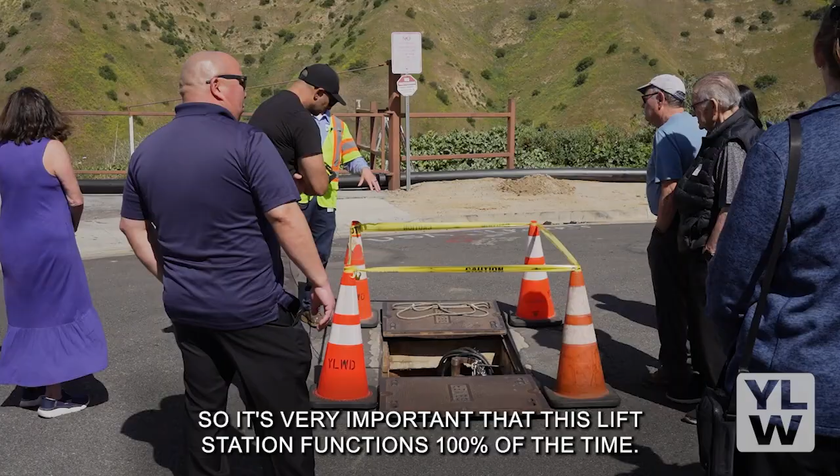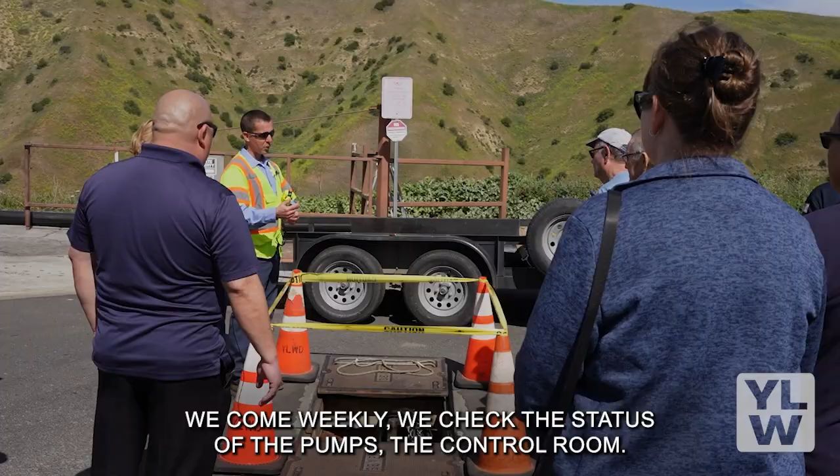Do you have to dig up this cul-de-sac? Normally when the lift station is functioning, we don't have to do anything. We come weekly, we check the status of the pumps, the control room.

Did you guys show them the control room? We did, I think he's talking about construction. When you renovate it? Yes. So for construction, it's actually going to go where that circle is right behind Freddie. They're going to excavate there in the street and install a brand new composite manhole assembly, wet well assembly, new pumps, new piping, new motors. It's going to have a brand new instrumentation and control panel here, and that'll be ready to serve us for 30, 40, 50 more years.